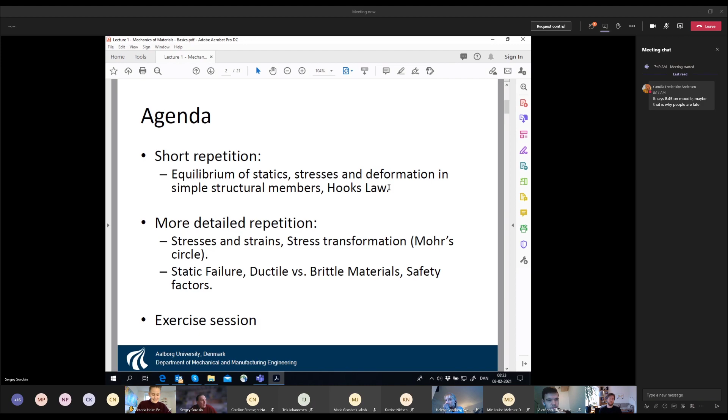We should begin with the equilibrium of the whole body. Then we have to go into the stresses or internal forces inside the body. Then we say that there are some deformations or strains, and then we calculate displacements if the displacements are of interest.

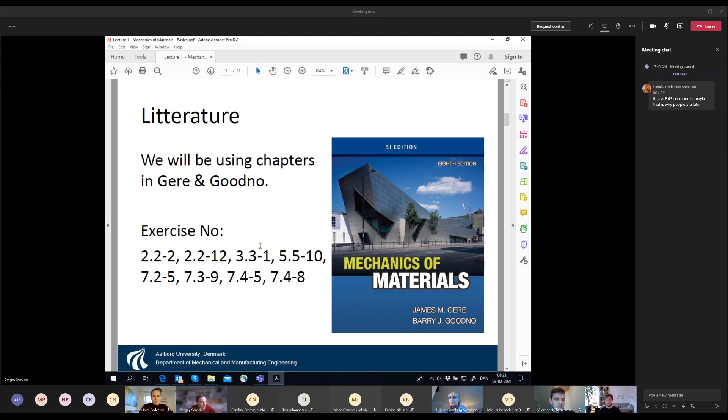And then in the literature for this part of the course, this first 4 lectures, it's this book by Gere and Goodno, Mechanics of Materials, and it may be any edition. Here it's the 8th edition, but earlier or later editions are still okay. And the exercises which I'm going to offer you with solutions are these ones, and they more or less cover the whole bunch of problems in mechanics of materials.

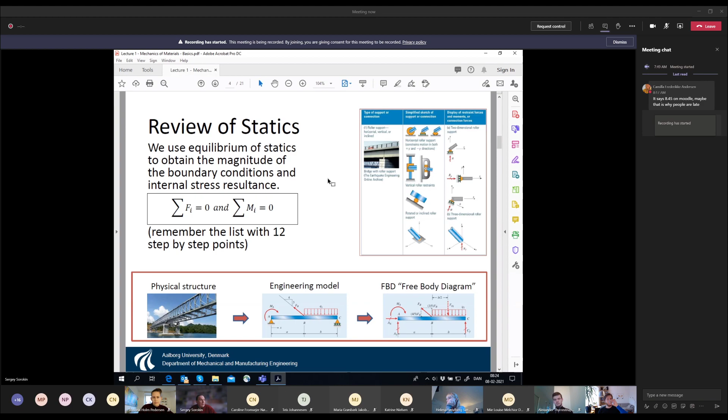So it's in equilibrium. Likewise, here you have this picture in the left corner of a bridge, and this bridge is in equilibrium. Of course, if some train passes, it may be engaged in some vibrations, but in principle it's basically equilibrium.

And in order to ensure the equilibrium, we have to formulate very simple statements: that the sum of the forces and the sum of the moments acting at the structure must equal 0. In general, the forces are vectors, so they have 3 components in Cartesian coordinates, and likewise the moments are also vectors. So in this frame here, we have three equations of equilibrium for the forces, with i meaning x, y, and z, and three equations of equilibrium for the moments.

Again it's x, y, z. But as I understand, in the course you've been dealing with, which is quite an introductory course, you've been limited in your analysis to what is called 2D structures. So then it was just the plane equilibrium conditions: we have x and y directions for the forces, and we have only one equation for the moments.

I'm not going to discuss in detail these nice pictures, which just explain the difference between what is called active forces and reactive forces. Again, this is not quite difficult to imagine. For example, if we take a look at this bridge, and a train is passing this bridge, then the weight of this train is the active force — this force which is applied to the structure now, and then it is gone.

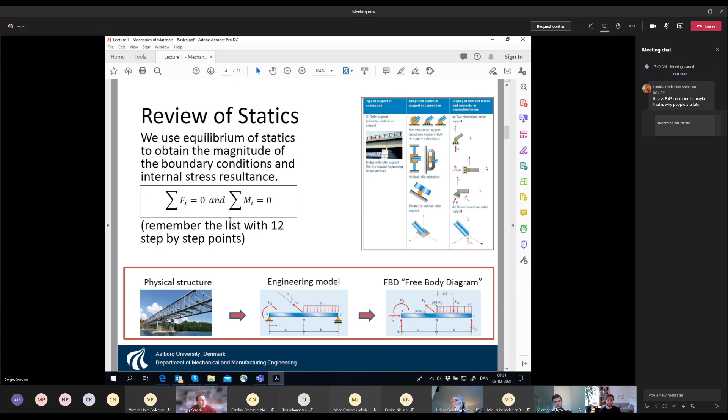The point is that now we have this free body diagram, and in this free body diagram we are provided with this moment, this force, and this distributed load, but we don't know these three forces: the horizontal reactive force, this one, and this one. So we have three unknowns, but we have three equations, because we have sum of forces in the horizontal direction, sum of forces in the vertical direction, and sum of moments with respect to any point. So, free body diagram.

This is the very fundamental concept of mechanics of materials, and it is concerned with finding these reactive forces. Then we have the equilibrium of the whole body, and this equilibrium is the sum of forces in the horizontal direction, in the vertical direction, and sum of moments. And then I hope you remember these kinds of rules.

So if you have a distributed load like this, then you have to find its resultant, and this resultant acts in the middle of where it is applied, so it's here. Then if we have these three equations, we immediately find these components of reaction forces, AX, AY, and CY. So we have found these forces, and now we do the very important step in mechanics of materials.

Now we say that these forces ensure that this body in general is in equilibrium. But if the whole body is in equilibrium, then each and every piece of the body must also be in equilibrium, right? This is quite obvious. So it cannot be that the whole structure is in equilibrium but some pieces of this structure are not in equilibrium.

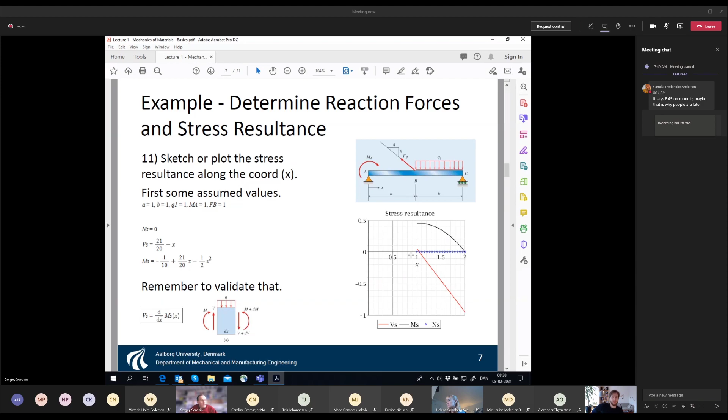Here deliberately, Jorn showed only this part of the diagram. So you see this empty space, simply because in this sort of reminder, we consider only this part of the beam. So if we want to put the full diagram, we have to chop here and set up the free body diagram for this part, or alternatively for this part.

But if we plot the stress resultants for this part of the beam, it goes like this. So this is our axial force, and of course it's zero, because here we have no horizontal force, so of course it's zero. Then our shear force is a linear function, because here you have this x, and then our bending moment is a parabola which goes in this direction.

And then we have here a very important point, that we are after the strength of the structure, for example strength of this beam. So what we are interested in is the maximum value of the bending moment and maximum value of the shear force. Does this make sense? If you have any questions, just interrupt me, don't hesitate, because I know you've done this before with Jorn, but it's important to make sure you understand it.

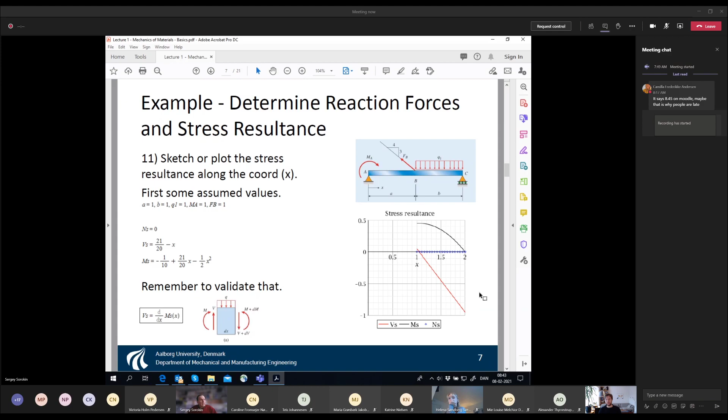So what we take out of this is that we have maximum moment and maximum force. And we have to compare this maximum moment and maximum force with what is called allowable force and allowable moments, which are of course controlled by the property of material.

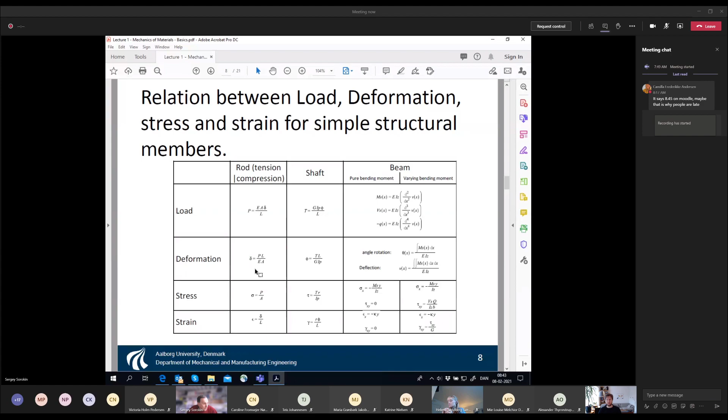It's just a summary of what you did in mechanics of materials. So we have deformation, stresses, strains in all these cases. Now we come to the next concept in mechanics of materials, and this is the concept of elasticity. And the idea of elasticity is quite simple.

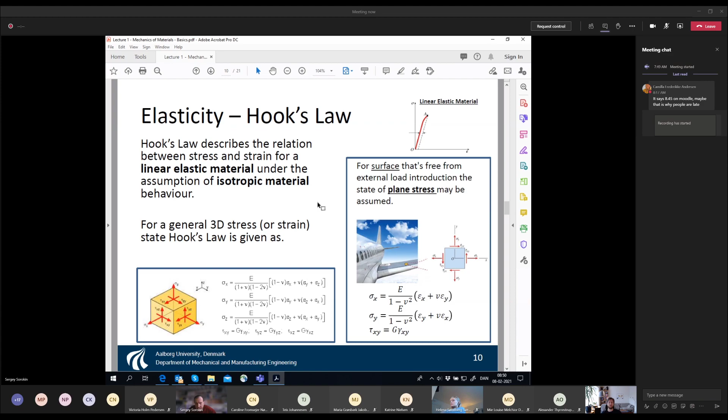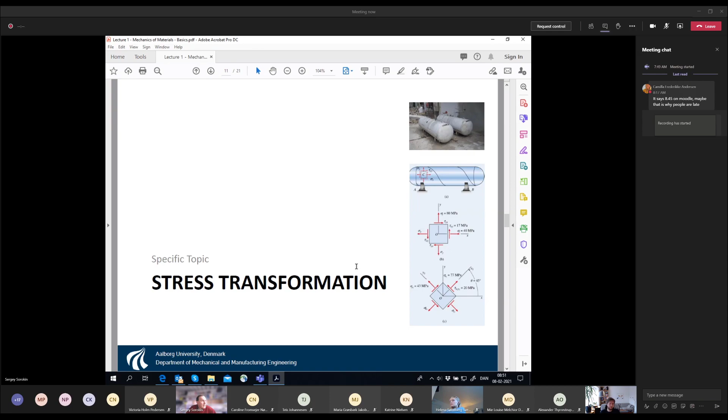The next thing in the theory of elasticity is the concept of stress transformation. This concept is quite involved, but the underlying idea for why we bother about these inclined cross sections is that we are interested in the strength of the structure.

So our ultimate goal is to make sure that the structure, no matter what it is—an airplane fuselage, a building, or whatever—is strong and withstands the given forces. In order to make sure it's able to withstand the given forces, we have to find the maximum stresses.

Because the way we do the design of the structure is that you have the real structure, you model it with means, let's say here in mechanics of materials, as a rod or as a plate, in finite element method—something we'll discuss later in this course. You do this finite element discretization, but your ultimate goal is to find the maximum stress. In other words, we are interested in finding the weakest link—the point where we have maximum stress.

And then we calculate this maximum stress. For ductile materials we find what is called equivalent stress, but we'll discuss that a bit better later, for materials with plasticity. Then we compare this maximum stress or equivalent stress with the allowable stress. So this is our main goal: we have to determine the maximum stress and make sure that this maximum or equivalent stress is not larger than what is permitted for the given structure. This is the ultimate goal of mechanics of materials, to ensure their strength.

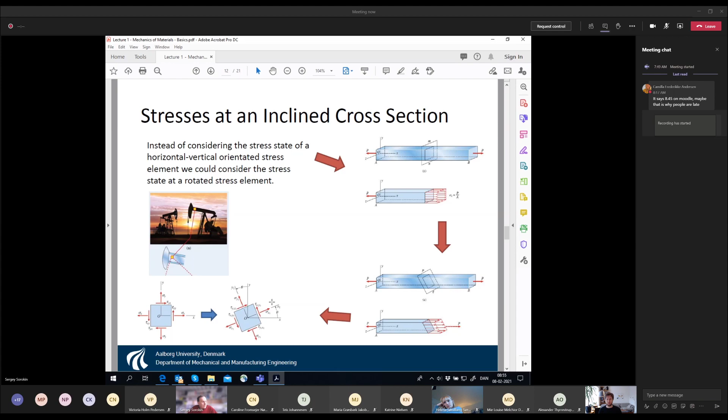So then in order to accomplish this task, to identify the critical state of the structure, we have to do this stress transformation. I think you had this with Joran, right? Have you seen these pictures? So it's quite a tedious mathematical derivation, and I definitely don't want to go into the technical details—you've done it with Joran. I just want to convey the point here.

So what is the reason, why do we bother to do this stress transformation? We bother to do it because we want to ensure that the structure withstands the given loading, and there are different types of failure. It might be the case that if we have found the stresses in this system of coordinates x and y, sigma x, sigma y, and tau xy are not the largest—that the largest stresses exist somewhere else. We have to find these largest stresses, and in order to do it, we have to do this transformation.

So our ultimate goal is to do the following thing: we have the structure, and it's a very complicated 3D object.

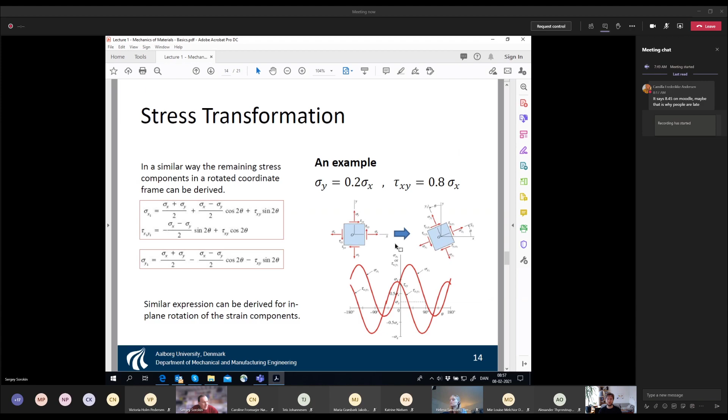So then you'll discuss finite element method. This is something already built into the software for stress transformation. I think this is something more confusing than helpful to explain, but this just shows you that depending upon how you do this rotation...

So now what happens is that you have this system of coordinates x, y, and in this system of coordinates you have the given values of the stresses, and then you start to rotate, and it goes like this. But then I think we can survive without it.

What is really important here is the concept of principal stresses, because the principal stresses are what we are actually after. We want to find the maximum normal stress and maximum shear stress acting at a given point of the structure, because this is exactly where we do the assessment of strength.

Depending upon the properties of the material, we may have a problem of failure due to the maximum shear stress, and we can also have failure, for example for brittle material, due to the principal normal stress.

So we also plot these diagrams, and these principal stresses are found using this formula—here is the end result. We have sigma 1, sigma 2, these are two principal stresses, and they may be in compression or in tension. So we calculate sigma 1, sigma 2, and then we also calculate this maximum shear stress using this formula.

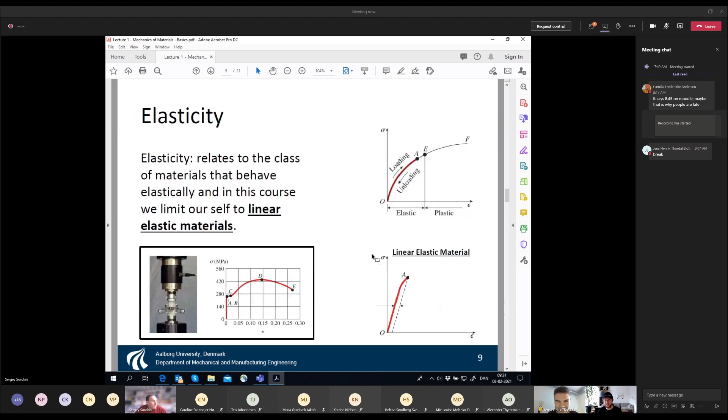So let's continue, and now we come to this point... yes? I have one question. Yes, please. Regarding, I don't know what slide it was, but can you go back a few slides? Yes. Oh, not that far. It was regarding the principal stresses.

Yeah, the top right corner, there's this formula. When do you use that? So this formula tells you how to find the stresses for an arbitrary angle theta. So you see here you have the angle.

Just let me show. So this is the picture. You have found the stresses in the x and y directions, but that doesn't mean they are the largest. So what you want to do is find the stresses if you start to rotate this square and tilt it by an amount theta. You do this rotation, and if you tilt it like this, then all the stresses become different. The way they're changing is defined by this formula.

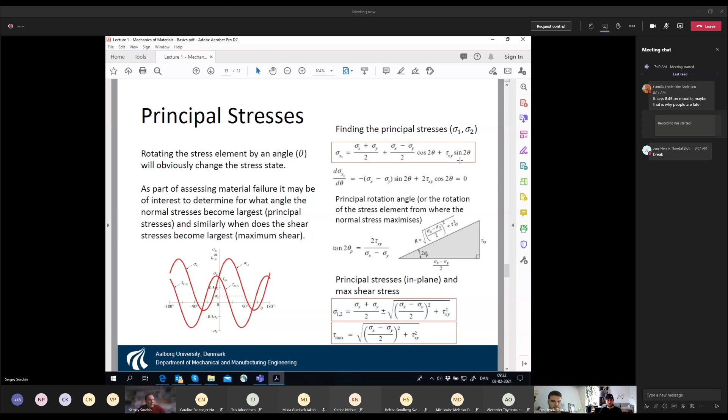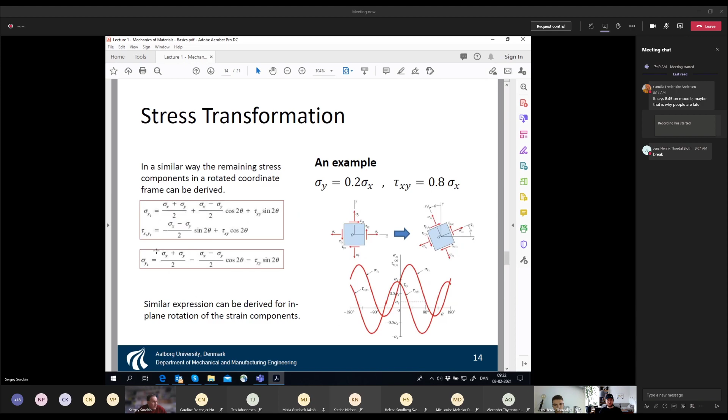All by this, in principle it's the same thing, right? This formula and this one. It just tells you how the stresses sigma x, sigma y, and tau xy change if you rotate this thing. The purpose of this is to find the maximum normal stresses and the maximum shear stress. So this is a formula - you have cos and sine, and if you just exclude cos and sine, you have this Mohr circle. So it's all the same story: this formula and this picture. This picture is just the graphical presentation of this formula.

And the purpose is to find this stress, and this stress. Does it answer your question? Yes, thank you. More questions, please.

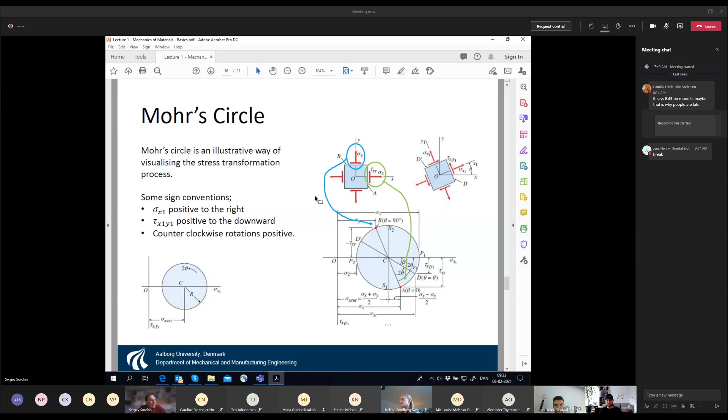No questions? Okay. But again, please, of course, I understand that this introductory part of the course is just to remind you what you did before. So this was something quite fast, but just to recap the key concepts. Now we come a bit closer to what we are going to do in my part of the lectures. In the remaining 3 lectures, it's a bit more advanced look into the details, specifically the details of failure.

So then we have failure here - these are sort of nice pictures, not very nice actually, but anyway, you see this broken glass, and here you have this wooden beam broken. This is something which we don't allow in real life, and I think it makes perfect sense. So whatever we design, we don't want to have this, and we don't want to have this. We have to ensure that the structures are strong enough to withstand the external loading.

The very first thing, which I probably already mentioned but have to repeat again, is that whether we do mechanics of materials, advanced mechanics of materials, or finite element method, we always have the situation that we know the forces - the forces are given. We know the material - material is also given. And then we have to design the structure to withstand given forces, made of given material, without failure. This is the idea of reliable design. So you know the forces and you know the material.

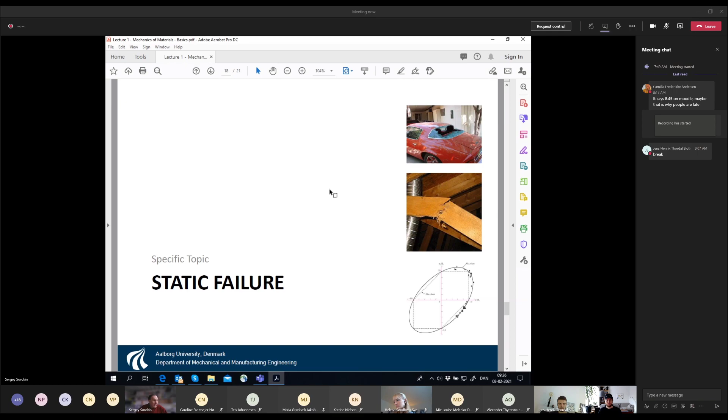Now we have this, what is called static failure. And the idea, again something I've explained to you, is that any chain is not stronger than its weakest link. This clearly shows this very simple message. You have a very complicated structure - you may have, I don't know, an airplane. In order to design a new type of airplane made of new material, you have to be able to identify the weakest point, the point where you have the highest stresses.

Because precisely at this point, you expect material failure. And here you have this kind of interaction between the structure and the material, because the shape of the structure gives you a distribution of the forces, but the failure depends upon what material you are using. The simple and more obvious division is ductile or brittle materials.

The difference between these is very simple. Brittle materials are not able to withstand plastic deformation - they don't have any plasticity. They have very small deformation in the elastic region, and then they break down. So there's no possibility to accumulate energy in plastic deformation. That's why brittle materials like cast iron and glass are not used much in structures. We definitely prefer materials which are ductile, capable of accumulating energy in plastic deformation. So the failure process depends on the nature of the material.

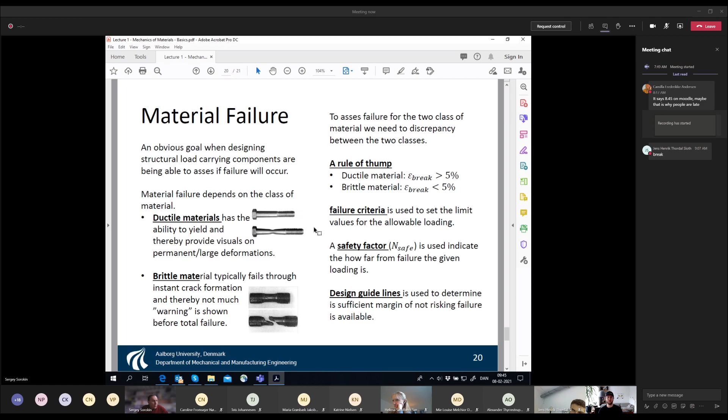If we do the experiment, we can really see this necking, and we can stop at any time and drop the force back to zero. Then we can easily see whether we have plastic deformation, which is irreversible, or elastic deformation, which is fully reversible. So we do these kinds of things: extension, torsion, extension plus torsion, 3D bending, 3-point bending. Then we can stop at any time and assess the specimen. For more complicated cases, it's very difficult.

So what we introduce here is this: let's say we do an experiment with uniaxial tension. With this uniaxial tension, we immediately identify the yield stress. We find the stress in uniaxial tension which produces plastic deformation. Now we have to define what is the true reason for transition from elastic deformation to plastic deformation. This reason is mathematically presented as a criterion. We have to find some number which uniquely tells us whether we have plastic deformation or elastic deformation. This is what is called a criterion.

For ductile materials, there are two criteria: one is called the von Mises criterion, and the other is called the Tresca criterion. In this picture, you can see this ellipse, right? And then you have this dashed line, which lies inside this ellipse. This ellipse is what formulates the von Mises criterion, and these straight lines define what is called the Tresca criterion.